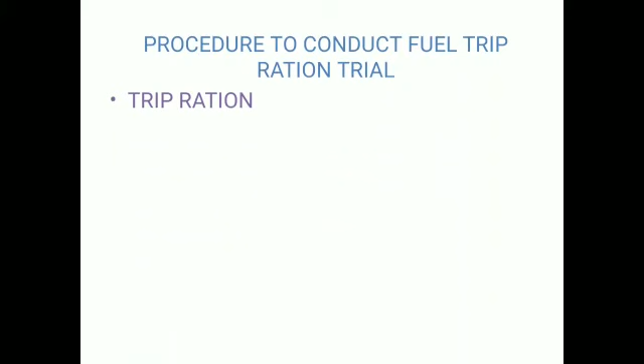Fuel preparation trials. Procedure to conduct fuel trip ration trials. Procedure to conduct fuel trip ration trials. Trip ration. Trip ration is fuel required to work a nominated train from its starting station to the destination.

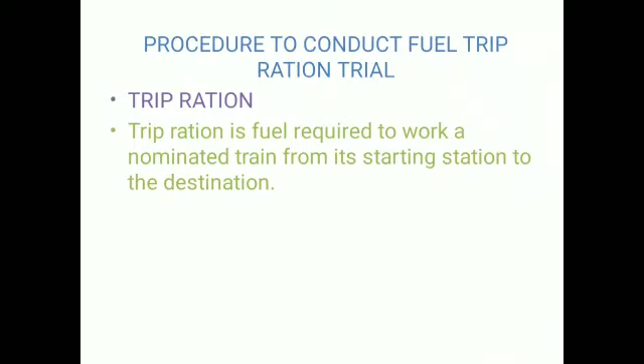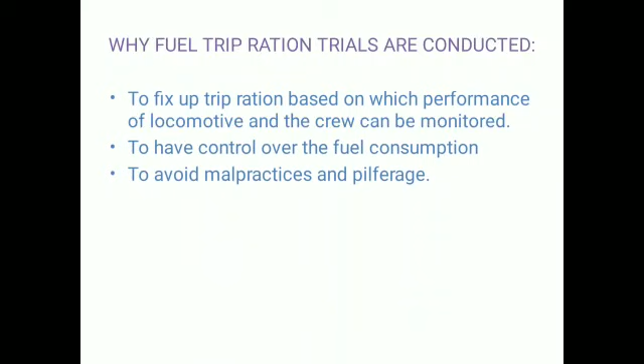Why fuel trip ration trials are conducted? To fix up trip ration based on which performance of locomotive and the crew can be monitored, to have control over the fuel consumption, to avoid malpractice and pilferage, to assess the quantity of fuel required for procurement.

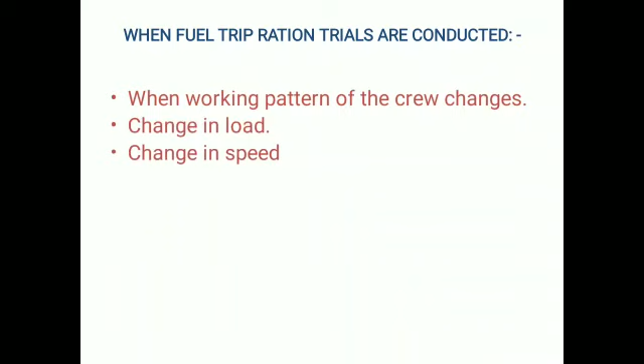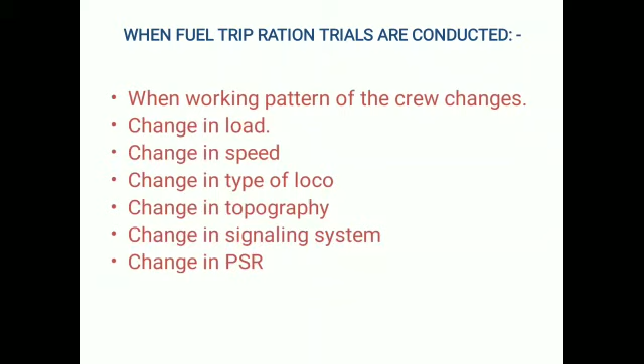When fuel trip ration trials are conducted: when working pattern of the crew changes, change in load, change in speed, change in type of loco, change in topography, change in signaling system, change in PSR, induction or extension of trains.

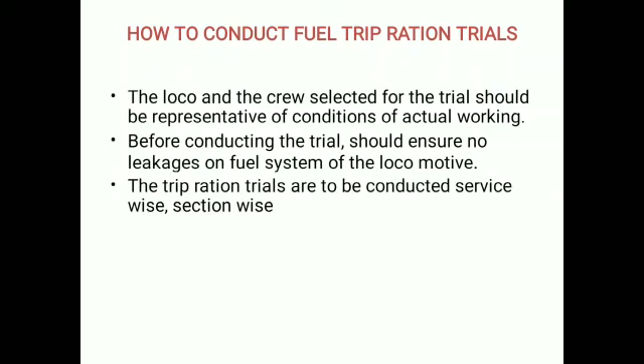How to conduct fuel trip ration trials? The loco and the crew selected for the trial should be representative of conditions of actual working. Before conducting the trials, ensure no leakage on fuel system of the locomotive. The trip ration trials are to be conducted service wise, section wise. A running engine is reasonably to be in good fettle.

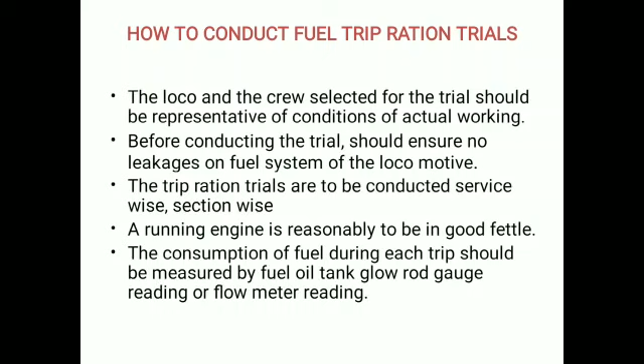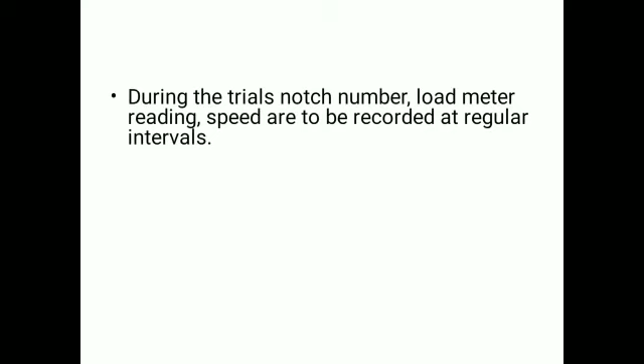The consumption of fuel during each trip should be measured by fuel oil tank, glow rod gauge, reading or flow meter reading. During trial, notch number, load meter reading, speed are to be recorded at regular intervals. Weather conditions, period of power applying, idling or stopping etc. are noted.

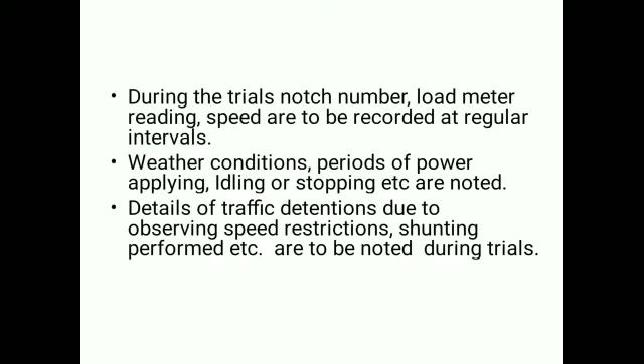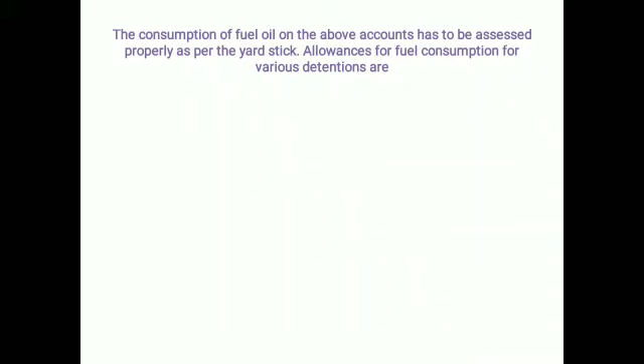Detail of traffic detentions due to observing speed restrictions, shunting performed etc. are to be noted during trials. The consumption of fuel oil on the above accounts has to be assessed properly as per the yardstick. Allowances for fuel consumption for various detentions are idling per 1 hour 25 liters, that is for WDM2, WDM2C, WDG2 locos.

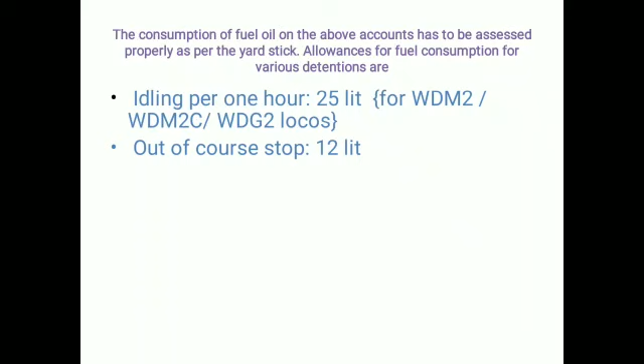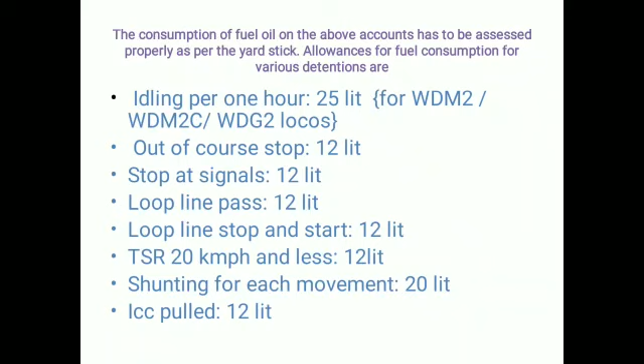Out of course stop 12 liters, stop at signals 12 liters, loop line pass through 12 liters, loop line stop and start 12 liters, TSR 20 kmph and less 12 liters, shunting for each movement 20 liters, ICC pulled 12 liters.

To arrive trip ration for a particular service on a particular section, the consumption of fuel due to traffic detention, detention due to speed restriction, shunting performed etc. are properly assessed and subtracted from actual consumption of fuel. In the case of mail, express and passenger trains, the load during the trial is the same as the normal load.

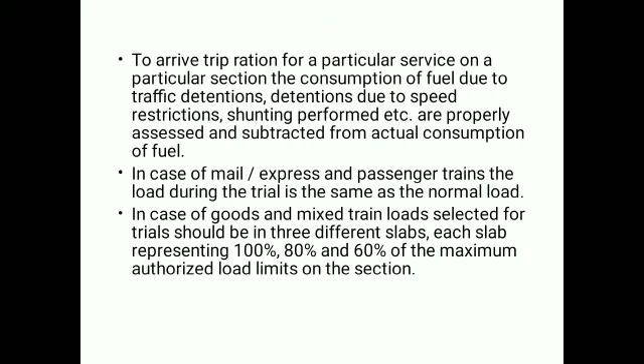In case of goods and mixed trains, loads selected for trial should be in 3 different slabs, each slab representing 100%, 80% and 60% of maximum authorized load limits on the section. A maximum of 3 sets of trials should be arranged in case of mail express and passenger trains. Similarly, in respect of goods trains, also 2 sets of trials should be arranged in respect of each of the slab.

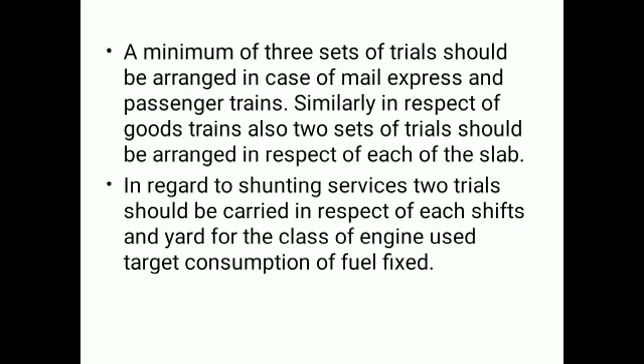In regard to shunting services, 2 trials should be carried in respect of each shift and yard for the class of engine used, target consumption of fuel fixed. While submitting the proposal for a trip ration, the following particulars to be shown for each trial and an average of 3 trials to be calculated.

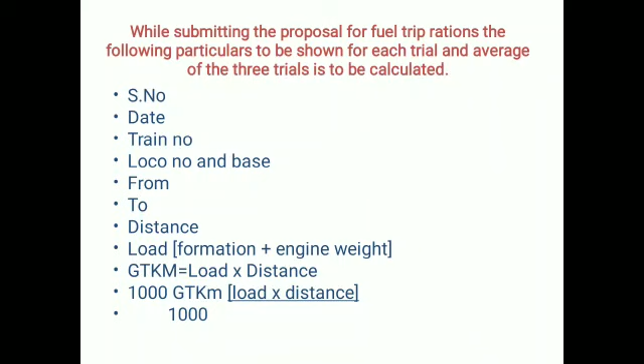Number 1, serial number, date, train number, loco number and base, from, to, distance, load means formation plus engine weight, GTKM is equal to load into distance. 1000 GTKMs means load into distance by 1000. Total fuel consumption, total allowances, net consumption is equal to total fuel consumption minus total allowances.

The formula for SFC in liters, net consumption by 1000 GTKMs. EKM, net consumption by distance. Booked ORT, booked stops, remarks.

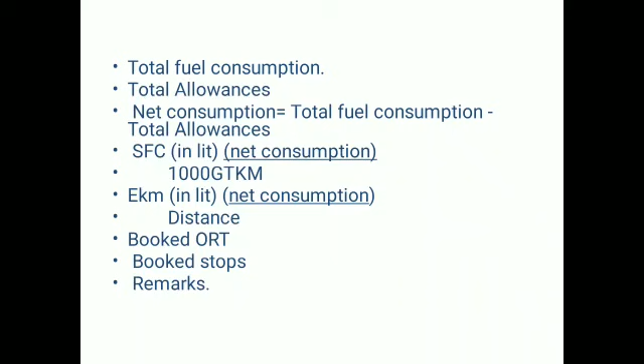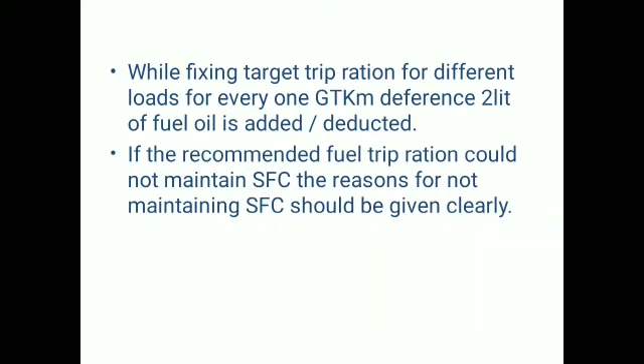While fixing target trip ration for different loads for every 1 GTKM difference, 2 liters of fuel oil is added or deducted. If the recommended fuel trip could not maintain SFC, the reason for not maintaining SFC should be given clearly.